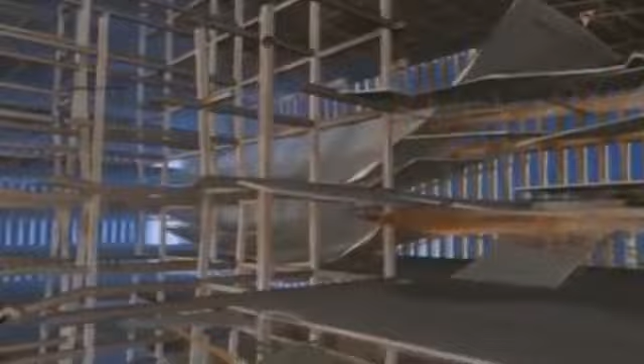In a documentary first broadcast last December, many of the reasons for the collapse were uncovered. But since then, disturbing new evidence has come to light. I think the building was a death trap for a lot of reasons. It's very tough. I mean, it just deepens the tragedy of that day, that some of the elements could be predicted in advance, and we could have done something about them. This isn't just an aesthetic thing. This is designed to protect people's lives.

While no one doubts the blame for the tragedy lies squarely with the terrorists who caused it, it now seems that at least some of the loss of life could have been prevented before one of the world's premier buildings was reduced to this.

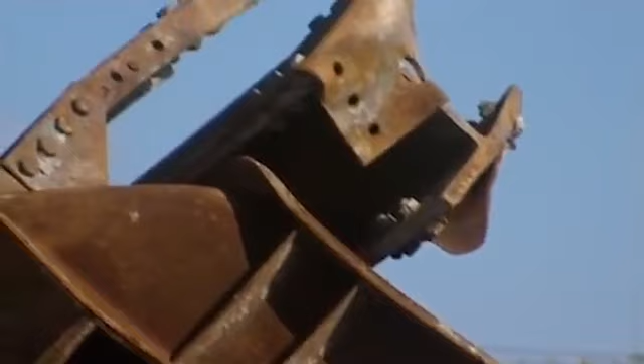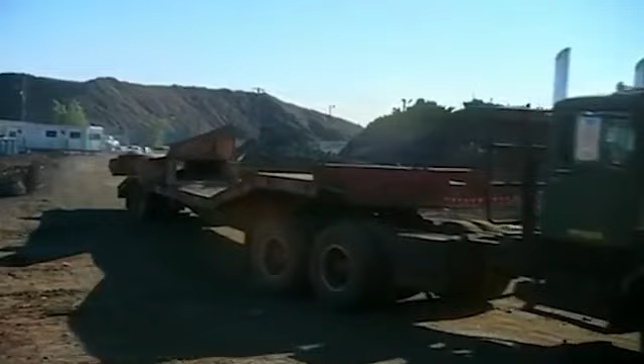Within days of the collapse, the steel skeleton of the two gigantic towers began arriving in this New Jersey scrapyard. As each piece was brought from Lower Manhattan, huge grappling machines struggled to cope with lumps of metal that weighed over twice as much as the trucks used to transport them. The very ground shook as they fell just a few feet. Within weeks, thousands of tons of high-strength steel lay in massive, twisted heaps.

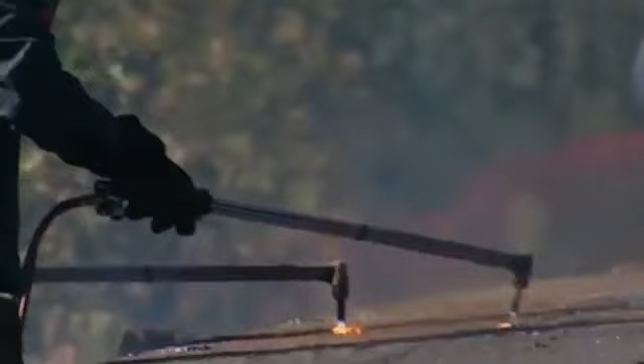Most of the steel was quickly cut up and exported to the Far East, sold for $120 per ton. And these days, the yard stands almost empty, which for many of the relatives of those who perished is a cause for concern. We want to know why the buildings collapsed, how they collapsed, and we want to make sure that this never happens again. And we really don't know how we can ascertain that with most of the evidence lost.

Sally Regenhard lost her son, Christian, a probationary fireman who had just finished his training, while Rich Gabrielle worked for an insurance company in the South Tower. Injured in the impact, he was unable to escape before the building collapsed. The legacy that we will leave for our loved ones is the changes that we're going to make. Never again will buildings like this be built if we can help it.

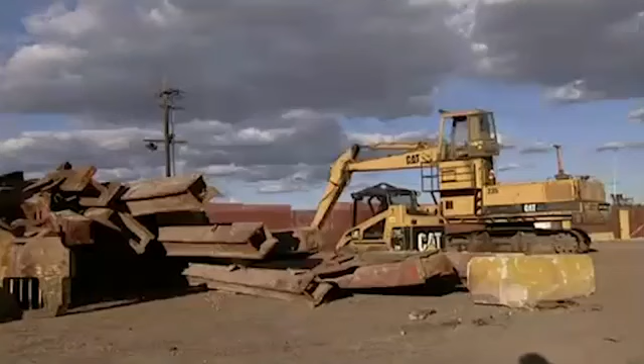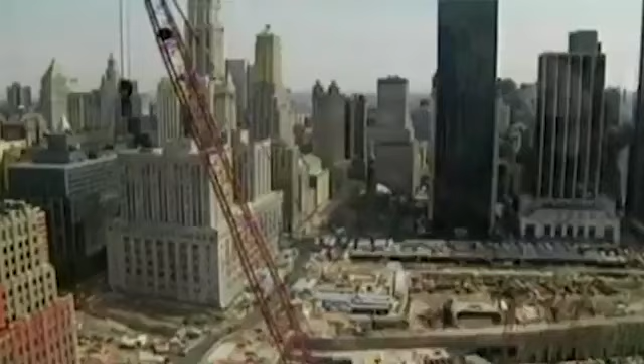What's left of the towers will form the basis of an official investigation, although it's not clear how complete such a study could be. This was the largest structural failure ever witnessed, and the hope is that lessons can be learnt for the future. The structural engineer who built the towers has his office here in Lower Manhattan. It used to have a commanding view of the complex, but now it overlooks what has come to be known as Ground Zero.

The responsibility for arriving, if you will, at the ultimate strength of the tower was mine. And the fact that they didn't stand longer could be laid at my feet. Do I feel guilty about it, about the fact that they collapsed? The circumstances on the 11th of September were outside of that which we considered in the design. Today, if I knew then what I know now, they would have stood longer, of course.

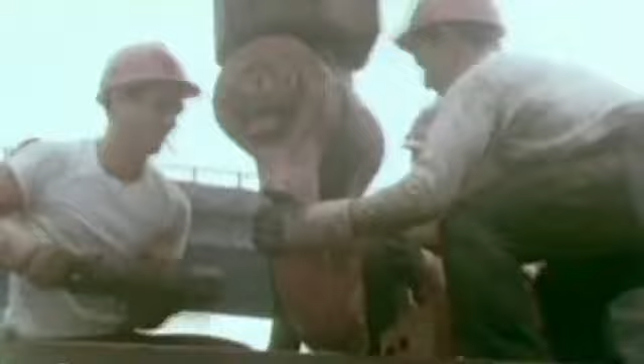Leslie Robertson was just 34 years old when he started work on a project that would win many awards. Cutting-edge technology applied on an enormous scale. The towers were not to be normal skyscrapers. They were to be innovative in almost every way. They were to have more office space than the entire city of Liverpool, taller than anything ever built.

Conceived in the optimistic, forward-looking 1960s as the perfect solution to a problem that badly affected New York, inner city stagnation and decay. It was a classic American response to a problem, which is hit it right down the middle with as much firepower as you can give it. It was just whammo, the two biggest skyscrapers in the world, clearing away blocks of lower Manhattan. Well, that was going to fix everything, right? That's how we thought in the 1960s.

Back then, the man in charge was Guy Tozzoli, who 31 years later saw the towers fall as he drove to work. Honestly, I never thought the towers would collapse. It just never occurred to me. They had stood there since 1970 when we opened, and it just didn't seem possible. I remember I cried sitting in the car.

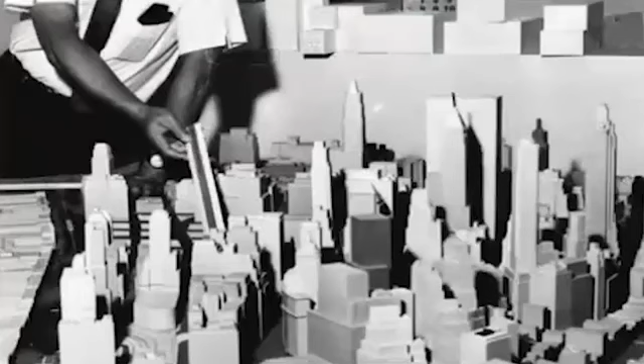In happier times, Mr. T, as he was known to his staff, was in charge of what the Reader's Digest called the biggest building project since the pyramids. My job was to make a program which the architects would follow. How many feet of office space, how many feet of consumer service area, a place for customs, a hotel, and then to find the architectural team that could carry it out.

The architect was to be Minoru Yamasaki, or Yama as he was known, a Japanese-American who died in 1986. He conceived of a pair of 80-story towers sprouting from a huge open plaza. But even these giants would not have enough office space for Mr. T.

I said, well, does it meet our program? No, he said, it's not. It's 2 million square feet short. Well, I said, why is that? Well, he said, you can't build a building taller than 80 floors. And I said, why? Well, he said, because the elevatoring in buildings taller than 80 floors make it impossible to be rentable.

The problem was that with a building over 80 stories tall, so much of the lower floors are full of the elevators needed to service the upper floors that the building becomes uneconomic. But this little problem wasn't going to stop Guy Tozzoli. And I remember saying to Yama, President Kennedy is going to put a man on the moon. I think you could build us the tallest buildings in the world.

The problem was solved by treating each third of the skyscraper as a separate 40-story building, so fewer elevator shafts would be needed. Repeated 3 times, this system was then linked together with 2 express elevators that were the only ones that would go the whole height of the building.

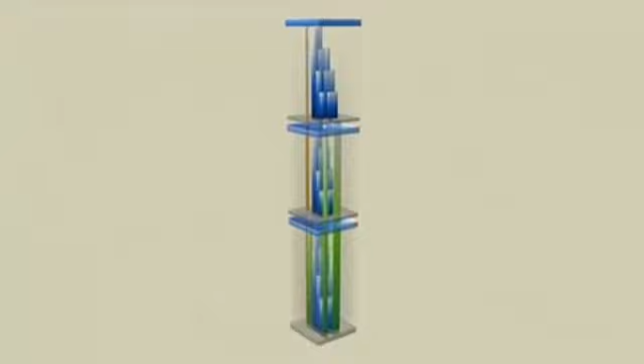If you went to an upper floor of the World Trade Center, you didn't get in the elevator at the ground floor and go to your floor. You got into a big, giant elevator to what was called a sky lobby, and there you switched for a local elevator to your individual floor. That's what they did, and that's how the buildings happened.

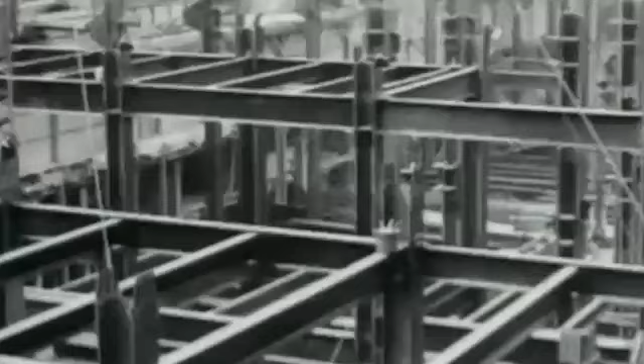It was now economically viable to construct towers so tall they would face a new challenge: the wind that can sometimes reach hurricane force in New York City. Dealing with gales such as these required yet more innovation. Most skyscrapers are built on steel or concrete frames, which is a grid of columns and beams that goes all the way through the building.

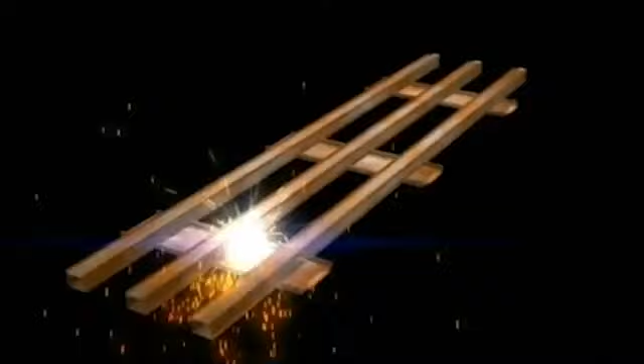The World Trade Center was different. It was what engineers call a tube structure. It was a very, very strong mesh of steel that surrounded the exterior. The way in which the walls were built was equally ingenious. 3 30-foot-long columns were welded together off-site to make a relatively lightweight yet rigid prefabricated panel. This was then hoisted up to join thousands of similar pieces, forming a square tube of metal 1/4 mile high.

In the middle stood a central core containing all the stairwells and elevator shafts, and giving the towers one of their major selling points: large open floor spaces of nearly an acre each. Tenants like open space. It's flexible. It allows them to have big open rooms if they want, or to put temporary partitions anywhere they please.

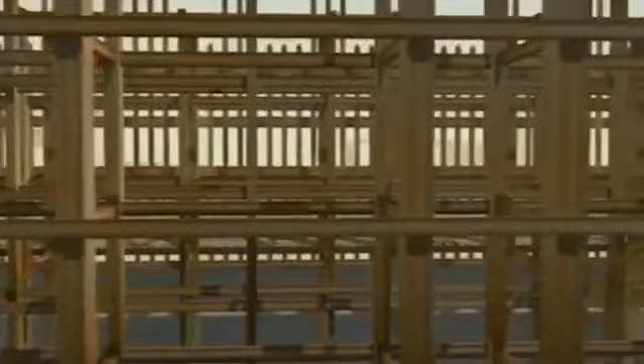There was another advantage to this system. It would save money. You could do a tube structure with roughly half the amount of steel than you would need for a conventional frame that goes all the way through the structure, but it would hold up just as well. It would be just as strong.

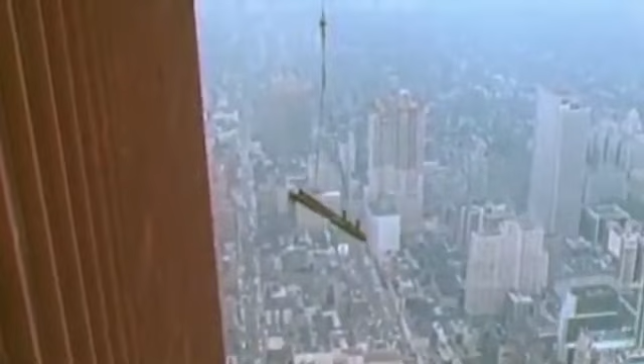The construction progressed at an amazing rate, 3 floors every 2 weeks. Steel came from all over America and beyond, arriving just in time to be hoisted to its new home in the sky. The pressure to get the job done was enormous, and supervising it all was an extremely busy Guy Tozzoli.

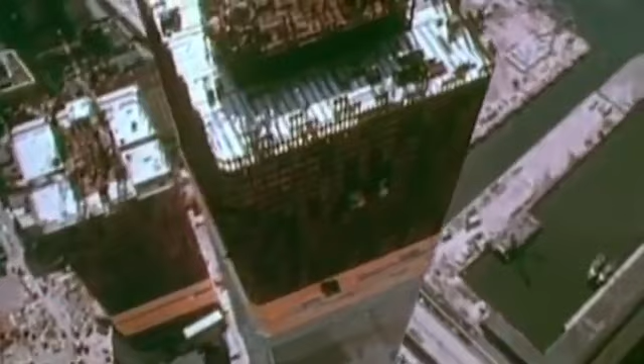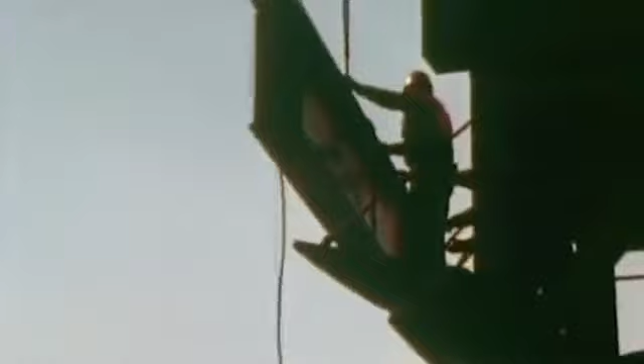Well, the first thing I did is I scheduled meetings of 17 minutes. That was the maximum you could have my time. And I took it religiously that way. And you got an answer. That was very important. Because if anything was delayed, $1 million a day to stop this project. And it had to be done on time.

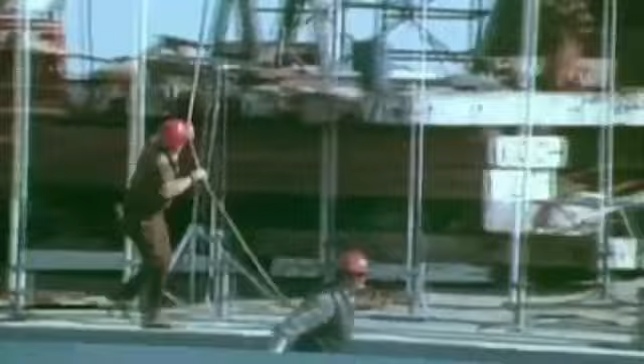The final job was to place a 350-ton TV antenna on the top of the North Tower, taking its total height to 1,719 feet, which made it, for a brief while, the tallest building on Earth. The Twin Towers, as they quickly became known, now soared above the New York skyline, becoming one of the most famous structures in the world. An instantly recognizable symbol of America itself, a demonstration of high technology coupled with breathtaking ambition.

To begin with, it proved difficult to find enough tenants to occupy the huge amount of space the building offered, but gradually the floors filled up, and 23 years passed uneventfully, save for the odd small office fire or jammed elevator. Such high towers made for an exceptional viewing platform, and they were a firm favorite with the tourists.

It's hard to be down when you're up on top of the world. So come on up, take a good look around, have some fun at the top of the world. The observation deck at the top of the World Trade Center. If you think the view from inside is spectacular, wait till you get outside to the roof. It's breathtaking. Have some fun at the top of the world.

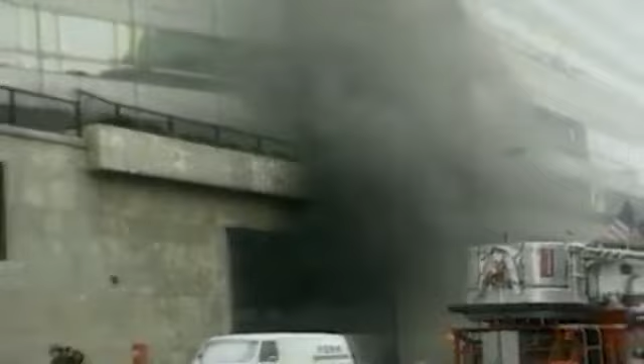The intention had been to demolish the base of the North Tower and cause it to fall into the south, but the terrorists had not reckoned with the extraordinary strength of the tube of steel. The bomb was a serious bomb, but in terms of a building of the scale of the World Trade Center, it was not a significant event in terms of the tower. Now, outside of the tower, it was another matter completely.

The bomb failed to demolish the towers because it exploded outside of the tube wall, the blast merely bouncing off and shattering several floors of the car park and a machinery space below that. The next time the terrorists attacked, the outcome would be different because 8 years later, they finally managed to penetrate the tower's defenses.

British-born naval architect George Slay was on the 91st floor of the North Tower at 8:46 a.m. I was on the phone, I heard a roar, looked out the window and saw this passenger jet coming towards the building. It was only about 2 or 3 plane lengths away from me at that point, and I didn't really have time to react. I saw it and then it was into the building.

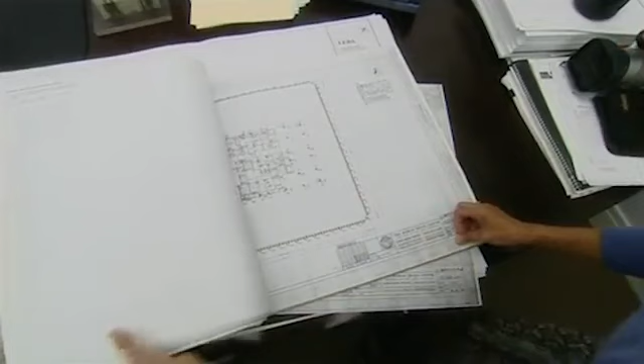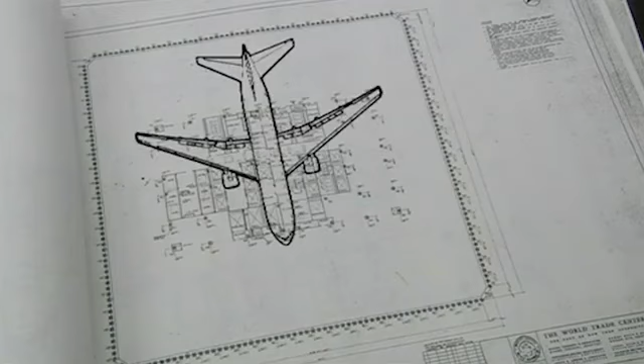These are the architectural drawings of the World Trade Center North Tower, Tower A. And this is the 94th floor, which is very close to the floors of impact on the North Tower. And the plane came in from the north side, so broadside onto the core. The core is from here to here, and from there to there. If an outline of a Boeing 767 is superimposed on the plans, the true scale of the impact becomes all too clear.

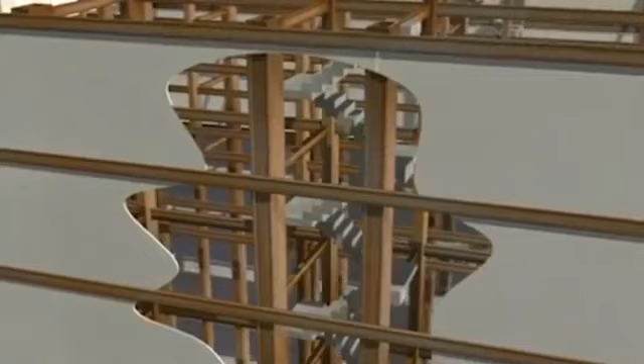The central core's walls were made of a lightweight board called sheetrock, which could offer little protection to the vital stairwells and elevator shafts it contained. I think, talking to some of the other people in our office, when we first went into the stairwell, the people who investigated the stairwells looked up and they could see that the stairwells were blocked above us. There was a lot of debris there, and there was nobody coming down from floors above us.

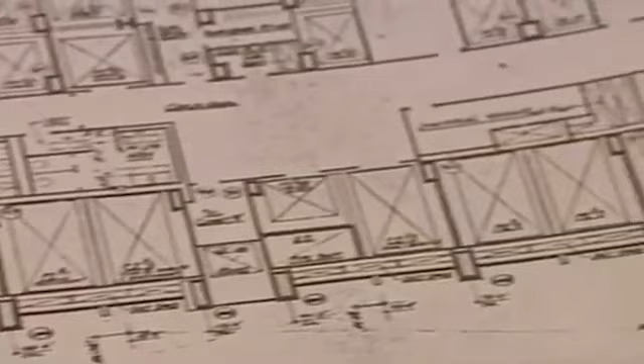Many of the elevator shafts were also severed. Lift operator Kelly Badillo was in the North Tower when the first plane hit. I think one of the elevators, the lower ones, I think the cables broke or something, because they just came flying down, boom. You could hear them. You could hear a lot of the elevators, and then you could hear the wind, like a wind tunnel. But a lot of the elevators came crashing down. Doors flying right open, boom, hitting the other side of the wall and everything.

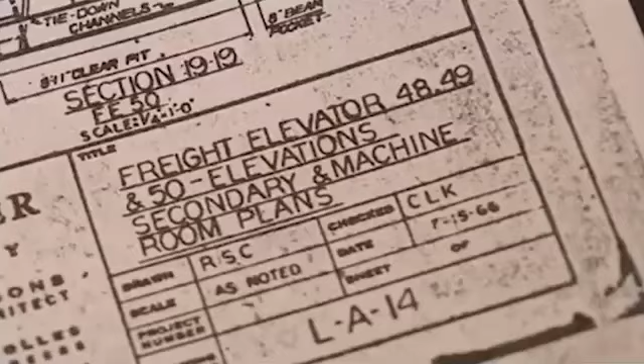Standing in the lobby, Kelly witnessed the destruction of the very system that had made the buildings possible in the first place. One of them flew open, and then people started coming out that elevator, and their hair was on fire. You could see the smoke coming off their jackets and everything. And they just kept on running. Once they got out, everybody just kept on running.

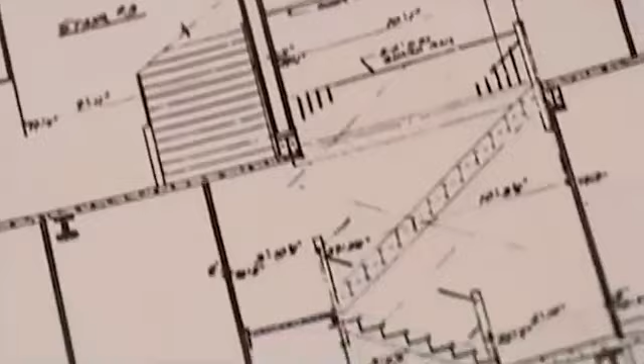In the North Tower, 1,360 people died above the point of impact. No one escaped through the damaged zone. It's really tragic, you know, when somebody loses a colleague, a husband, a son, or whatever, to explain to them that they died because of defects that we knew about before the incident. Jake Pauls is an expert on escape from high-rise buildings. He studied the towers after the bomb in '93 and believes that the stairwell design was misconceived.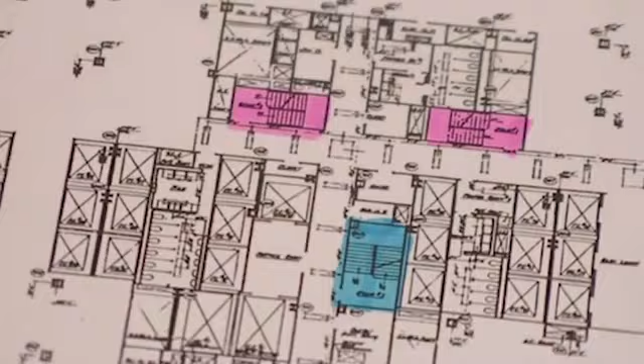One thing we see is the stairs are very tightly clustered together relative, for example, to the diagonal dimension. There's a traditional rule that says that the stairs should be at least half or a third of the diagonal apart, and we can see here they're actually much too close. This was a poor design in terms of the layout of the stairs because there wasn't enough redundancy. So if an incident affects one stair, blocks one stair, it's very likely to affect the other stairs.

Message received September 11th at 8:59 a.m. Hey Beverly, this is Sean. In case you get this message, there's been an explosion in World Trade 1. That's the other building. It looks like a plane struck it. It's on fire at about the 90th floor, and it's horrible.

Sean Rooney worked on the 98th floor of the South Tower. Before the second plane struck, he had already begun to leave, but was told to go back to his desk. When the plane hit the first building, the manager of his floor began an immediate evacuation. They headed for what I've since learned would have been staircase C, and at some point in that process, an announcement came telling them that the building was secure and that they should go back to their offices. No one knew a second plane was about to hit, and when it did, one chance to escape had already been missed.

Half an hour later, Beverly spoke to her husband on the phone. And he said, "Well, we're trapped. We tried to go down. We got as far as I think he said 79, and he said that we couldn't get down any farther, so we tried to go up, and he said the doors are locked." Many believed that they could be rescued from above by helicopter, but in fact, heavy smoke and obstructions on the roof made it impossible. Sometime after the '93 bombings, they had cluttered the rooftops with all kinds of equipment and barriers purposely to prevent helicopters from landing on the buildings. And they never told the people who worked there.

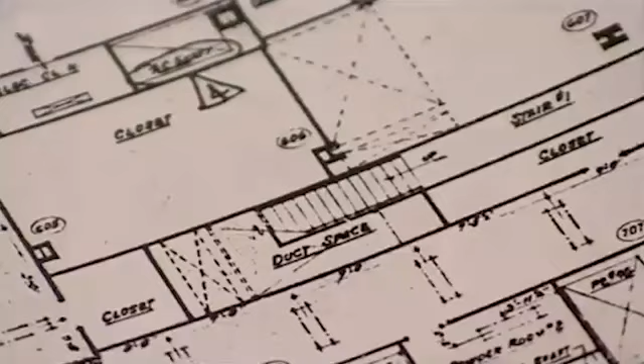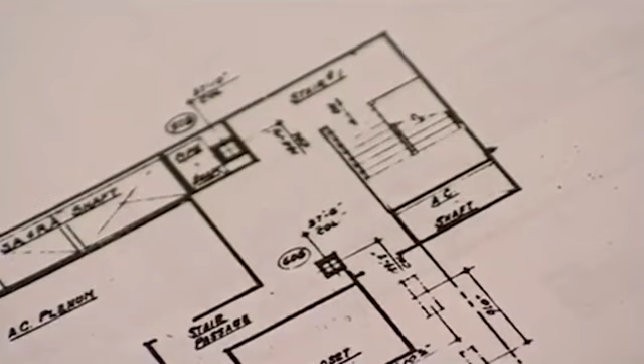In fact, one stairwell, Stairwell A, did remain open in the South Tower. It ran outside the central core to bypass some heavy machinery. Trying to get to the roof had wasted precious time that could have been spent finding the way out. So, in a life and death situation, they were working with misinformation. They would have looked for another staircase. There's no doubt in my mind that they would have said, okay, where are the other staircases located? And we've got to find them and we've got to get out. And it turns out that staircase A in that building was clear. Only 18 people found the escape route. Sean Rooney died along with 600 others in the South Tower. It now seems that at least some of those lives could have been saved.

As the awful sight was beamed around the world, it seemed incredible that the buildings could stand at all. The truth was that the designers had considered just such a dreadful possibility, taking as their example the Boeing 707 passenger jet. The airplane we were envisioning was the largest airplane of its time, flying slowly and low, lost in the fog. In any event, we designed the buildings to take the impact of the Boeing 707 hitting the building at any location.

The Boeing 767 is similar in size to the 707, but the hijacked planes were not traveling slowly. They were near to their maximum speed. The energy contained in an airplane or any other moving object is proportional to the square of the velocity. Double the velocity and you have 4 times the energy. And so the energy imposed on the building by the 767 was very substantially more than the energy that we had assumed in design.

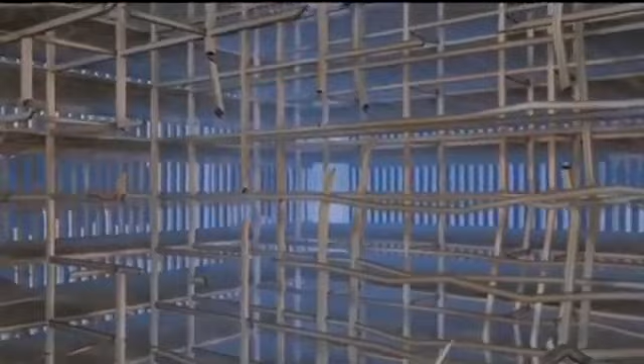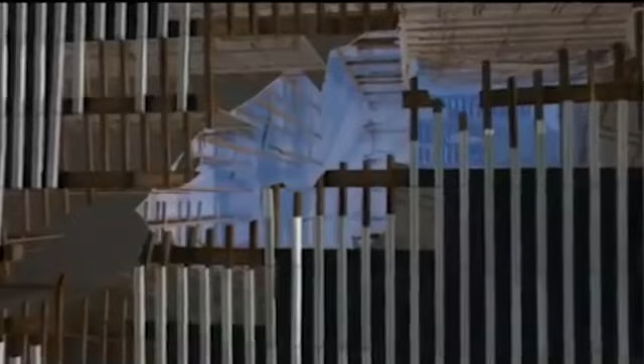The South Tower was even worse off, since it had been struck lower down and across one corner. This meant that not only was there more weight above the damaged area, putting it under much more stress, but also, because the damage was off-center, the upper section was now trying to lean to one side. The next phase of the tragedy would unpick what little strength was left.

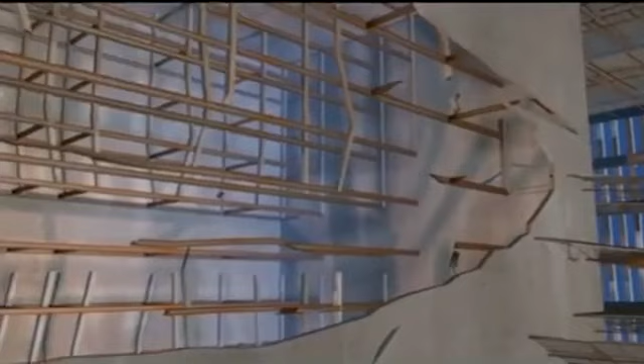These were the biggest buildings in New York City. Each floor was one acre in area, and we're looking at this, and we see smoke issuing under pressure for at least the top 20 floors, maybe more. So if we're using the 20-floor figure, you're looking at 20 acres of fire.

Although an aircraft impact had been imagined, it seems no one had calculated the effects of fuel on the structure. To the best of my knowledge, the considerations of the fuel in the airplane in terms of an explosion or a great fire was not considered. Now, we were not responsible for that aspect of the design, so maybe I'm wrong, but I believe it was not considered, and further I believe that had it been considered, it would have been proven to be impossible to deal with it.

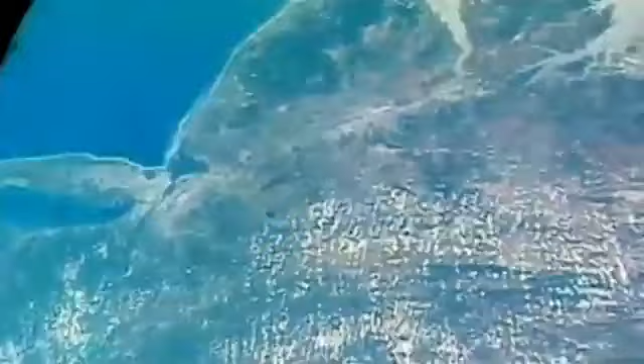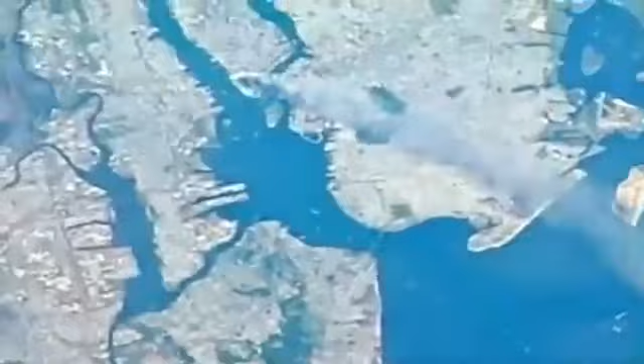Down below, hundreds of firefighters arrived at the scene, although in reality, the sheer scale of the towers meant there was very little they could do. A typical firefighting hose team can extinguish approximately 2,500 square feet. That's an area 25 by 100. If you get two attack hose lines side by side, they may be able to extinguish about 5,000 square feet of fire. The World Trade Center floor areas were 40,000 square feet. They're building these high-rise office buildings with open floor design and creating spaces almost 10 times more than the area we can extinguish with hose streams.

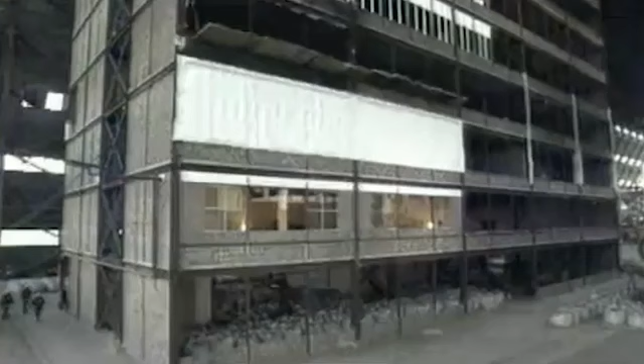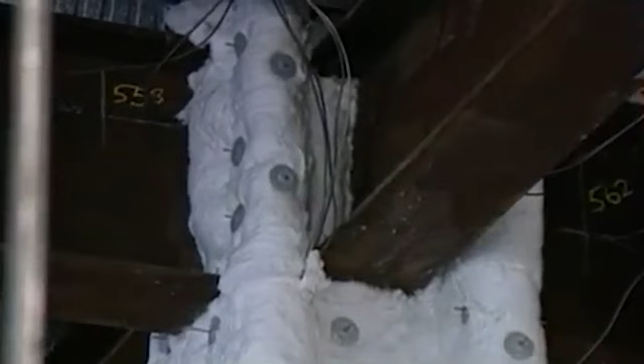The way in which steel-framed buildings behave in fires depends on their construction. In this test, done by British Steel in 1995, a large amount of typical office furniture was burnt to see what would happen to the heavy steel beams that supported the ceiling. When steel is bare, when it heats up, it gets weaker. It's not that it melts in a fire. In fact, normal fires are not hot enough to melt steel. Even if you were, for example, to use an unusual fuel like kerosene, you cannot achieve temperatures hot enough to melt steel. But what happens is it starts to lose its strength. And as it loses its strength, it starts to sag. It becomes softer and sags and can no longer support the load.

This was the largest test of its type ever carried out, and it showed how unprotected steel can be distorted even by a normal office fire. But as is usual in steel buildings, the structural beams only slowly and progressively warped and sagged. There was no chance of a sudden collapse. In over 20 years, I have not seen, until recently, a protected steel structure that has collapsed in a fire. So what was the cause of the devastating explosive failure that happened at the World Trade Center? How did such a massively strong steel building suddenly give way and come crashing down to Earth?

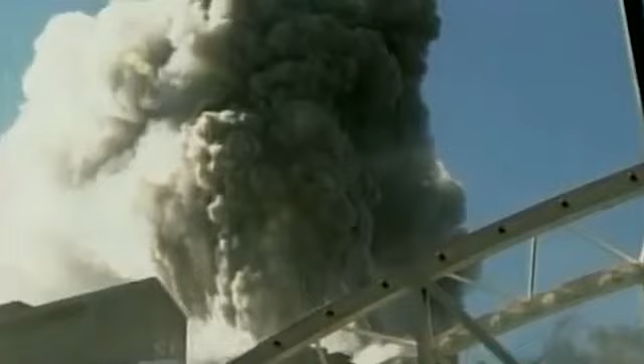I couldn't believe that it actually collapsed the way it did. Like everyone else, it was totally out of your human capacity to digest it and absorb it. I was as shocked as anyone else.

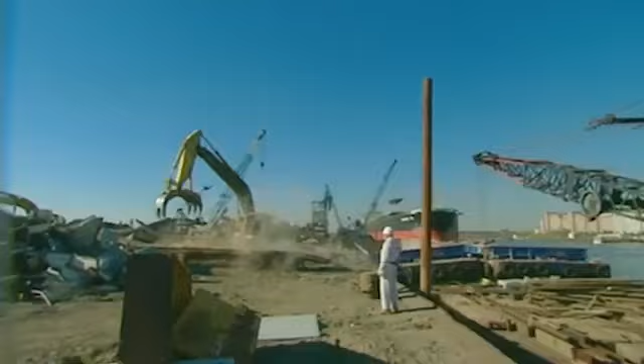Professor Hassan Astaneh was one of the few scientists to have examined the steel in the New Jersey yard before it was sold abroad for scrap. Here, amongst the ruins, he studied the columns in an attempt to discover what the collapse mechanism could have been. There were several clues that immediately pointed to a very specific and unusual scenario.

What you see here is actually very critical, very, very important. Perhaps this is the most important piece I have found so far. This piece comes from most likely Tower 2, where the plane went in and exploded. This is the inside face of box columns. So plane went in, exploded right here, and the explosion hit this surface.

What you see here is, first of all, a bend that is due to explosion, but more importantly, this is a signature of explosion here. This has happened due to explosive material hitting this column and making that bulge. So this is the floor where explosion happened. And the windows are blown away, everything is burned, even fireproofing on this floor is burned and glazed to the steel.

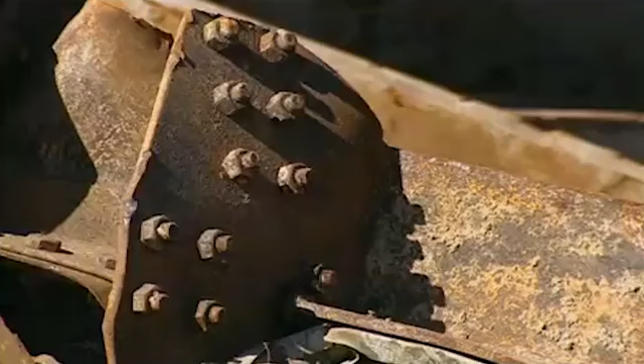The fireproofing in the World Trade Center was sprayed on, a dry, fragile material made of mineral fibers. Designed to protect the steel from heat, it played a crucial role in the durability of the structure. But there is evidence that at least in some areas, it failed to do its job.

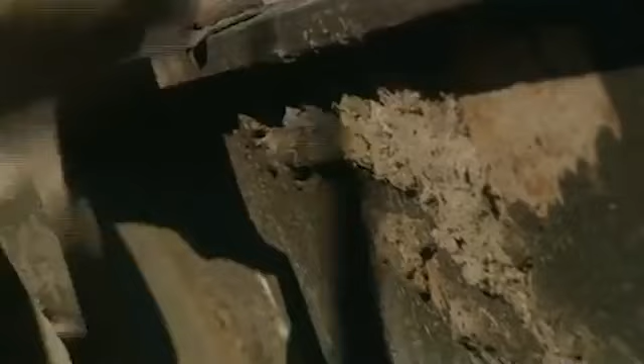This piece, as you can see, has been burned. You can see the smoke and the fire effect on it. You can see some fireproofing, but really not much of it is left. So you can see that when the building was burning, there was no fireproofing left.

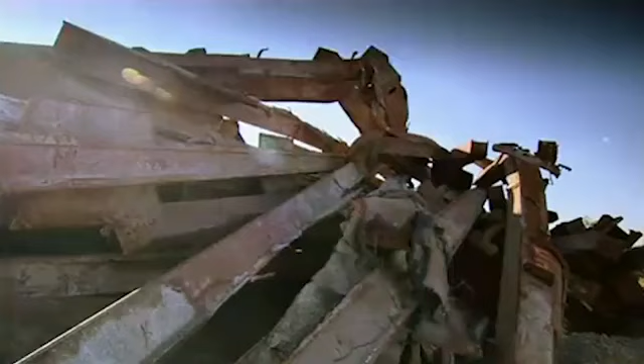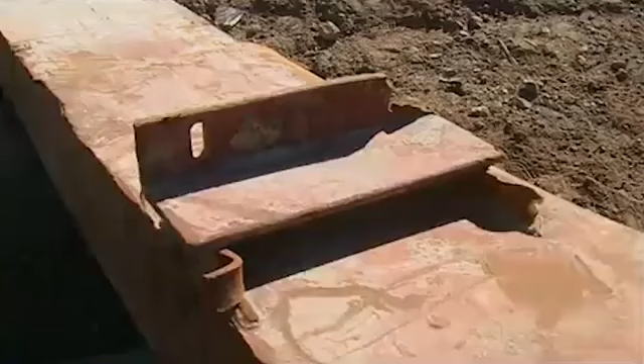Any lack of fireproofing would have meant that the steel was extremely vulnerable to the heat from the fires, and it seems that in the South Tower particularly, this may have had a disastrous effect on the support for the massive open-plan floors.

At the Massachusetts Institute of Technology, Professor Eduardo Kausel has been carrying out research into the disaster. It is always easy to play the general after the war. However, it is important to understand why it is that the structures fell. And if the structures did have an Achilles heel, I believe that this Achilles heel were the floors.

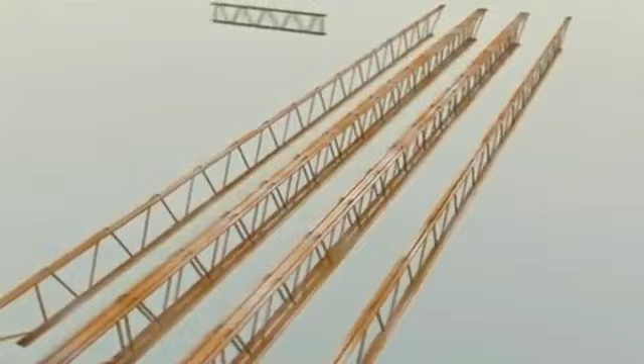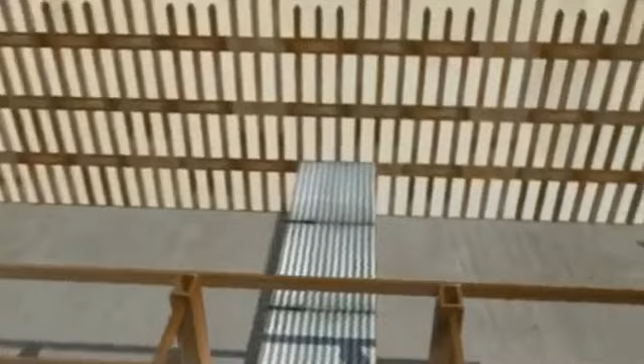The floor system was unusual for a high-rise building. Instead of the thick steel beams that are normally used, the floors were supported with lightweight structures called trusses. A steel deck was placed over them to form prefabricated panels, which were then hoisted into position. They were fastened at each end to brackets welded to the wall, and once in place, each floor was covered with a 4-inch layer of concrete.

This system was one of the reasons the towers could be built so quickly, since each floor was largely pre-assembled down on the ground. But the drawback with such lightweight trusses is that they can be very susceptible to fire.

There is no other construction technique that has killed more firefighters than trusses. We have a saying in the fire service, don't trust the truss. They fail during fire. A truss's strength depends on each and every beam and bar it contains. Damage even a small part of it, and the whole system fails.

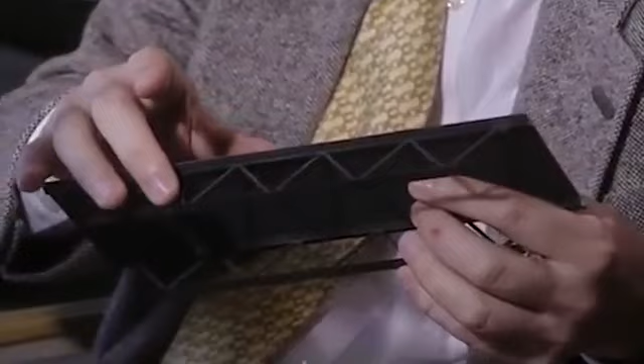Here we have a model of the floor system with the floors and the beams, the trusses. This system is very strong, is very light, very stiff, but it is also very susceptible to fire. And therefore it has to be fireproofed very well and appropriately.

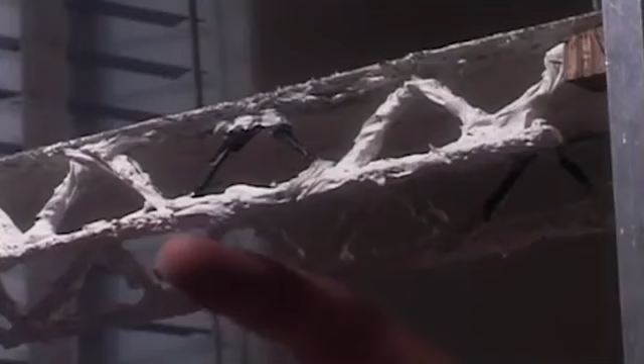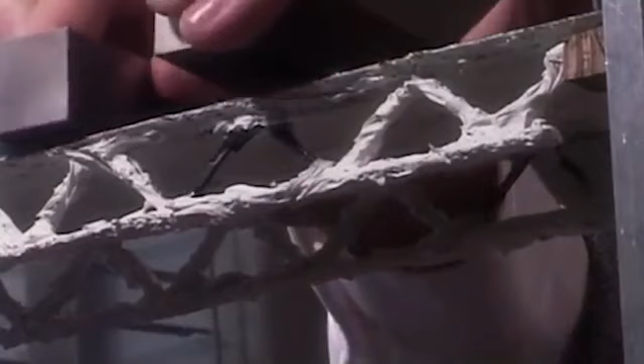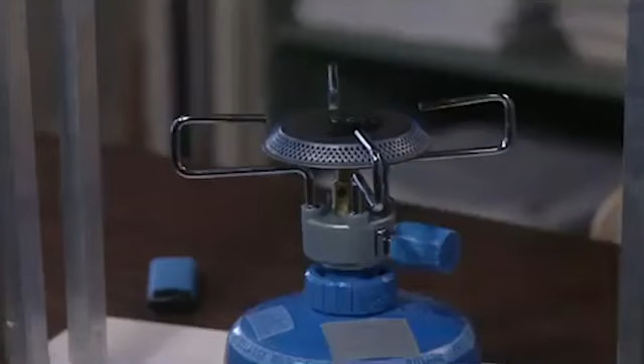To demonstrate this, I have here a similar floor system that has been fireproofed everywhere except at these 2 locations here, and we will see what effect these elements can have on the behavior of the structure. First, the load on the floor is simulated with metal weights, and then the system is heated up with a gas burner. Almost immediately, the unprotected elements fail, compromising the strength of the entire unit.

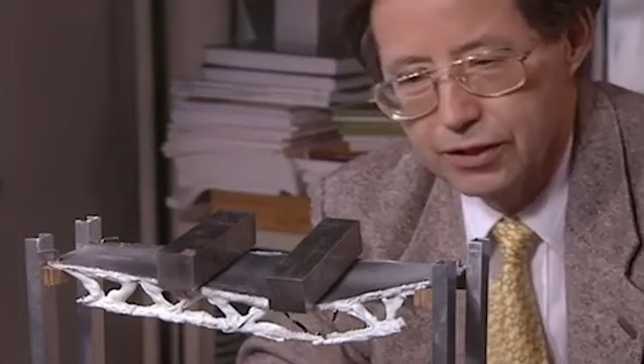This demonstrates that the structure is only as strong as the weakest link. This element that fails, even if it is only slightly exposed, is the one that determines how strong the structure will be. Even though most of the truss remains as strong as ever, the failed section pulls inwards, putting enormous loads on the connections at each end, which, if not properly protected, would also be weakened by the fire.

A theory reinforced by the findings made in the scrapyard. You cannot bend the steel like this without cracking it, unless you warm it up. So what this piece tells me is that this piece was very hot when the floor collapsed and bent it. So that must have been the initiation of collapse of this World Trade Center tower.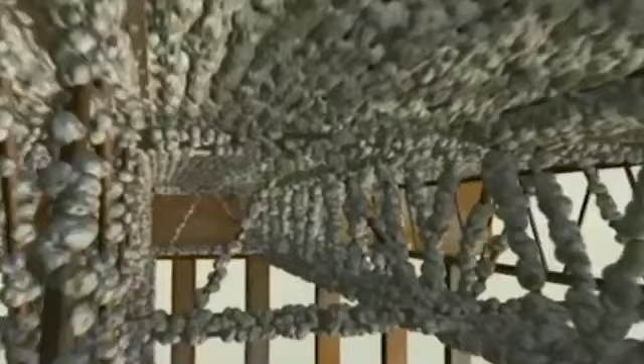So what happened to the fireproofing? Why, as appears, was it so ineffectual? It's been speculated that the blast from the impacts must have removed it, but there is another explanation, one that suggests that maybe the towers should have stood for longer than they did. The fireproofing had actually had a rather checkered history.

In 1995, a bitter court case took place about asbestos in the sprayed-on material, and consultant architect Roger Morse was asked to examine it. What he found greatly disturbed him. The fireproofing on the tenant floors, on the trusses, was missing in many locations. It was thin in virtually all locations. The fireproofing on the columns in the core was falling off of the columns in story-high sheets.

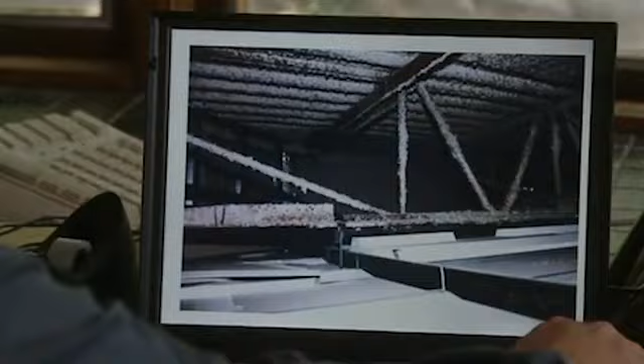These photographs, taken in the mid-90s, show the state of the fire protection in at least some of the building. Few places show a 1.5-inch thick coating, the amount required to adequately safeguard the steel. You can see that the fireproofing is missing from the diagonal. This is the diagonal that's going to the end point where the truss is sitting on the outside column.

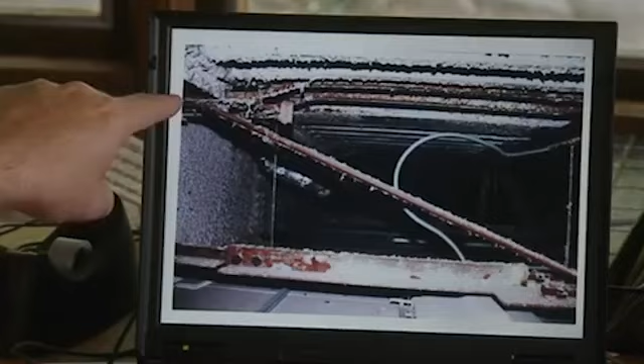Although he only examined the lower floors of the North Tower, Roger Morse's photos show that at the time the building was less than comprehensively protected. Many of the vital connections on which the floors depended were almost bare. If this were the proper thickness of fireproofing, this would be an amorphous blob of fireproofing material. The space behind this angle seat would be completely filled with fireproofing.

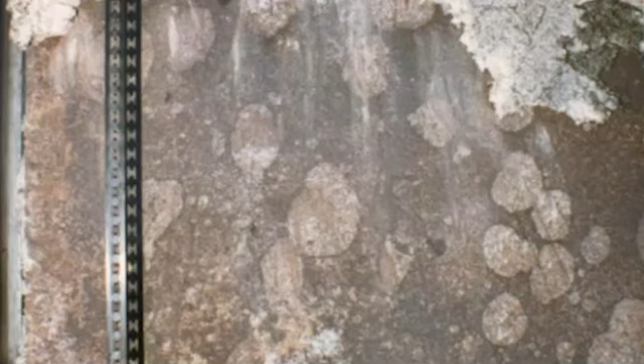I don't know what happened. The applicator didn't install it properly. It wasn't inspected properly. Somehow or another, the fireproofing guy was allowed to take a pass on this, which is really quite an outrageous thing when you consider the importance of what's going on.

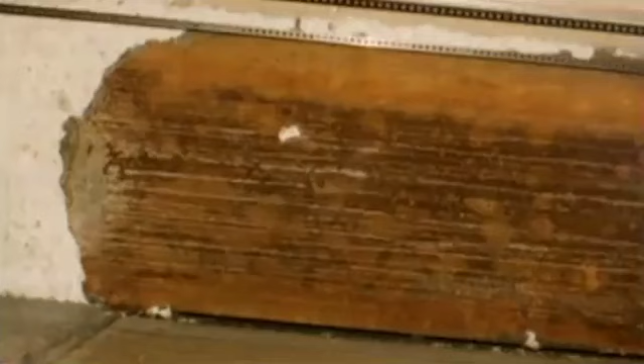In the central core, the reason the column's protection was in such bad condition was easier to explain. What had happened was that the fireproofing was applied to loose rust that hadn't been cleaned off the steel at the time the fireproofing was applied. So the fireproofing was stuck just fine to the rust, but the rust was coming loose from the steel, so the fireproofing would fall off with it.

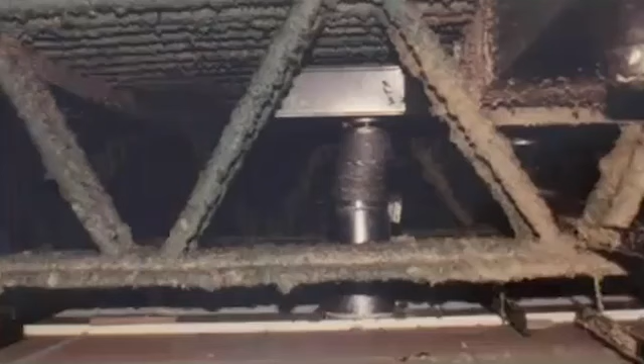Those responsible have stated that the maintenance of the fireproofing was an ongoing headache, but that the buildings were safe. The floor trusses at the impact point of the North Tower had been refurbished in the last few years of the building's life, but they had only got as far as recoating one of the impacted floors in the South Tower. They also contend that the impacts were so severe and the damage so great that the collapse was inevitable.

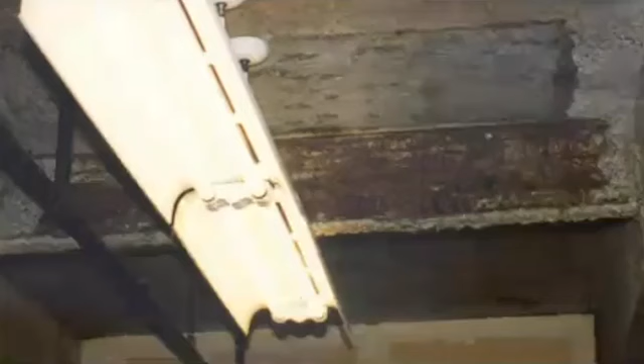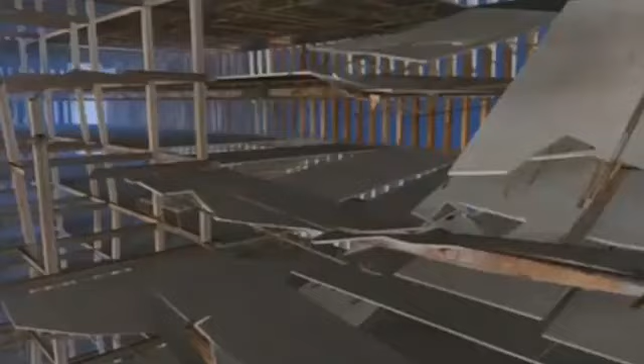Whatever the true performance of the fireproofing, the last phase of the destruction was now underway, for the design meant that with large parts of the floors removed, the entire tower would fall. Again, the principle is easy to demonstrate. Here we have two models. These two structures are identical except that this one here is missing an intermediate floor, and we shall see what effect this floor has on the way that the structures carry weights.

I'm going to be loading first the structure on this side. The important thing to keep in mind is that these loads are transferred through the columns to the table, and that this intermediate floor carries none of this load. All it does, this floor, is it ties the columns together and it provides stability to the columns.

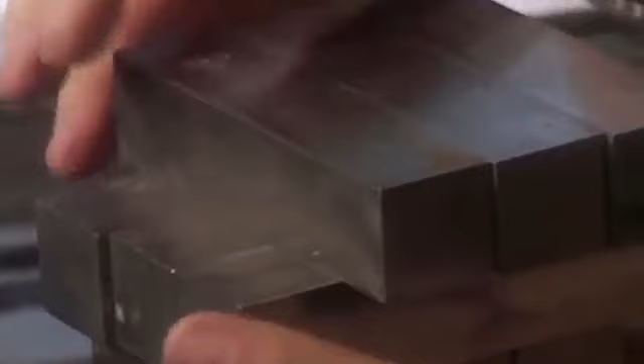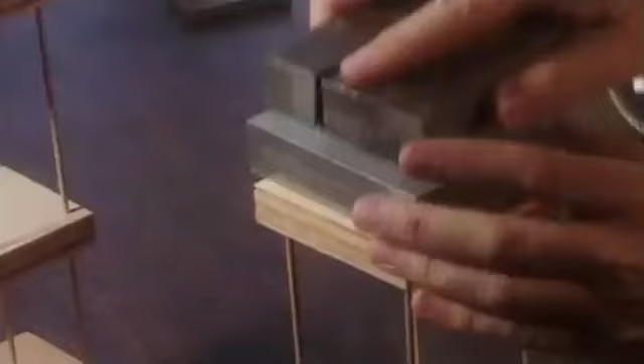The model on the left is easily able to take a very large load. And I could add more weight like this one here, perfectly stable. Let's begin removing weights and adding them onto the structure on the other side. If the one with the missing floor is tried, it cannot support nearly as much. Without the stabilizing effect of the floor, its columns twist and buckle, and it collapses.

The south tower burned for 56 minutes before it fell, its less adequately fireproofed floor trusses unable to brace the vertical columns and keep them from buckling under the immense gravitational load. While lower Manhattan was smothered in a filthy, choking dust, the fire continued to eat away at the strength of the North Tower.

It had stood for longer because it had been hit square on, and so could better redistribute the loads. It also had less weight above the point of impact, and its floor trusses were better protected. But the fire would seek out the weakest part nevertheless, and this time the core columns would give way first. Once the top of the building had fallen just the height of a single story, its vast momentum smashed each floor in turn, until all 500,000 tons of steel hit the ground at 120 miles per hour.